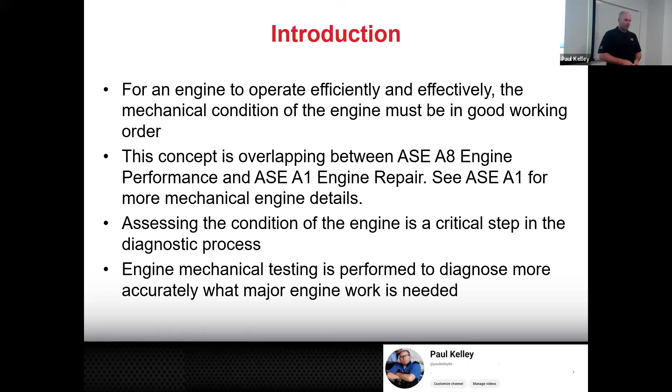So we're going to do some review of what would normally be ASE A1 stuff. Okay, and additionally, I told you earlier, there's ASE A6 stuff that goes into engine performance as well, but that's what we'll cover a little bit later, not this one. All right, so it's just extremely critical that we diagnose these right. So let's just say the first one right off the bat.

Excessive oil consumption. What does that mean? The engine is consuming, just consuming. So why is it consuming? Consuming is different than leaking. Okay, so I could even go a step more basic: if the engine's leaking all over the place, that probably really needs to be addressed as well, but that's not complicated.

You lift it up and you're like, oh, there's a bunch of oil all over here. That's not really engine performance. That's really, really A1, which is engine repair, sealing the engine, that type of work, right? So we won't talk a ton about oil leaks. We will talk about consumption. Those can be harder to diagnose. So if it's not external leaks, let's focus on internal leaks.

For example, we were talking about yours, but we'll make it about a different one. Who's driving the Toyota Matrix? Those are nice cars. I like those. Toyota Matrix is that you just can't kill those. They're good. It is, I'm telling you. Well, I mean, it might be older now, but those are good cars. So Toyota Matrix is a perfect example.

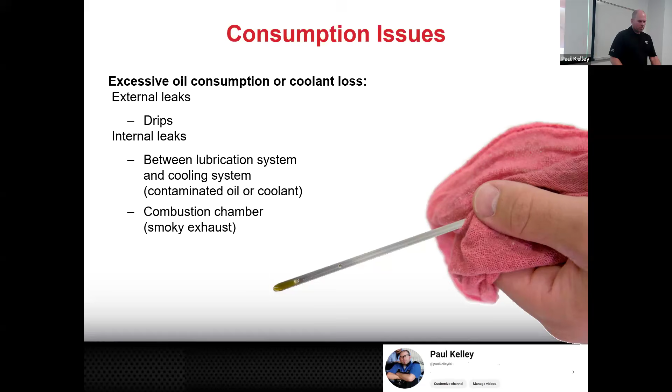So this is a pretty good indication, watching that oil level go down in a certain number of miles. But also, honestly, if you can see the blue-gray smoke, that's going to fail. I can tell you right now. Also in California specifically, that's one of the first tests they do. When you bring it in for a smog, they rev it up like this, boom, boom, and then they look at the back, and if it emits visible smoke, you're done. You failed already. Doesn't even matter if you've got all your monitors set and all that type of stuff. You're just done. All right, so that's pretty good probably for the oil consumption.

And then it could be coolant consumption as well, right? Coolant consumption is a bit different than oil. Every engine consumes some amount of oil because it's splashed on the cylinder wall and a little bit's left in the little scratches of the cross hatching. With coolant, there should be no consumption. It doesn't burn a little bit of coolant normally. If it's consuming coolant, there's something wrong.

Now, what I have seen is in some cooling systems, it's captured in a surge tank that's totally sealed. Those don't really lose anything to evaporation, but I've seen another type where it puts it in just a basic bottle with the flip open cap that's not real well sealed. Those can lose a little bit of coolant due to evaporation, but it's actually really the water evaporating out. The antifreeze doesn't really evaporate. It stays. It's kind of slimy and slippery. So if it has a little bit of low coolant, it doesn't necessarily mean that it's consuming it.

The most common thing is actually an external leak. But coolant leaks are kind of funny because your cooling system is pressurized. So maybe you have a leaking gasket, maybe a head gasket like this Explorer, I presume is a head gasket, or maybe it's an external gasket to the thermostat housing. That gasket may not leak until it hits, let's say, 13.5 psi. Make sense? If you pull in the shop and you shut the car off, you're not at 13.5 psi. The heat makes it pressurized. Once you shut the engine off, as it gets cooler and cooler, it's losing pressure.

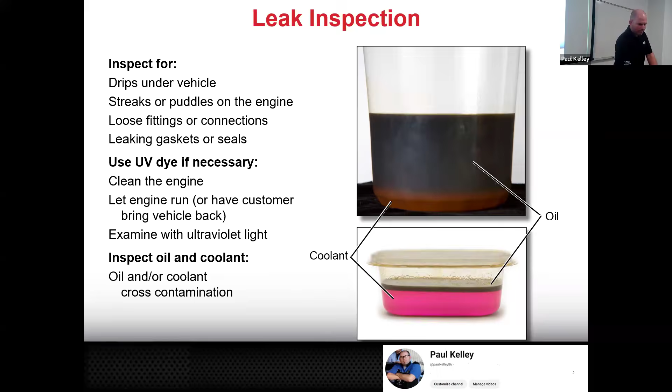All right, so let's say another clue to the engine. One of the first things we could do, if you remember that sample question we looked at, it's a good idea to do a road test. I don't call it a test drive because a test drive to me means you're testing it to see if you like it, see if you want to buy it. I'm going to do a road test, because I'm using the road to test the car. So could I check compression? Yes.

Could I also take it out on the road and drive it and get a sense of what the compression is? Yes. So therefore, to me, it's a road test. I'm using the road. And if I road test it and I get that smoke, look at this, gray blue. What do you think that gray blue indicates? Oil consumption. So maybe rings, head gasket, valve guides, oil seals, these types of things. We don't know. Now, I'll give you a little bonus.

If it's rings, typically when you gas it hard, like when you're wide open, remember that little Civic I told you about when it gets on the on-ramp? When they're wide open, if it's smoking in those instances, I'm probably thinking rings. But when I say rings, just understand that could be worn cylinders, but I'm saying bottom end, that's below the head gasket. Whereas let's say under wide open throttle, it seems pretty good. Under wide open throttle, you don't make a lot of vacuum. So there's not a lot of suction in the intake and in the intake port.

But on decel, you let off the gas and you go, brrr. Sound pretty good for like a B series, huh? Like that. That's when you build a lot of vacuum. And if it's valve guide seals, it'll suck the oil past the leaking seal and you'll get a lot of smoke on decel. So literally just being behind a car as they accelerate and decelerate, I can get a pretty good idea. On accel, that's probably bottom end, rings and stuff. On decel, that's probably more like worn valves, worn valve guides, or valve guide seals.

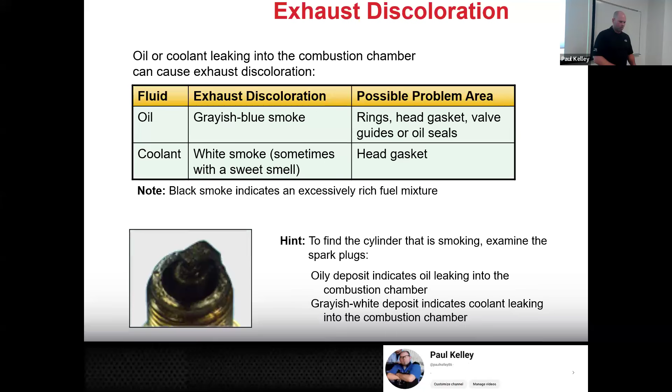All right, so what if the engine has a noise? There's some things that can cause engine noises. There's some things that can cause engine vibration. But ultimately, let's say the engine is knocking. We need to diagnose that. You need to diagnose why the engine's knocking. Don't be bolting stuff onto it. So I'll give you another example.

Let's say the engine's not knocking, but it's whining, right? A whining engine could be something like maybe timing chain or an oil pump, but it could also be a belt-driven accessory, an alternator, power steering, water pump, these types of things. So customers will come in and say, hey, my engine's making a noise. That's still an engine performance concern. It may have full power, but they're still like, hey, I've got a concern about how my engine's performing.

So if you think the noise is coming from the alternator, you put the point on the alternator and you listen through the stethoscope. And if it gets really loud on the alternator, then you move it to the engine and it's quieter, and you move it to the alternator and it's louder, kind of telling you the noise is from the alternator.

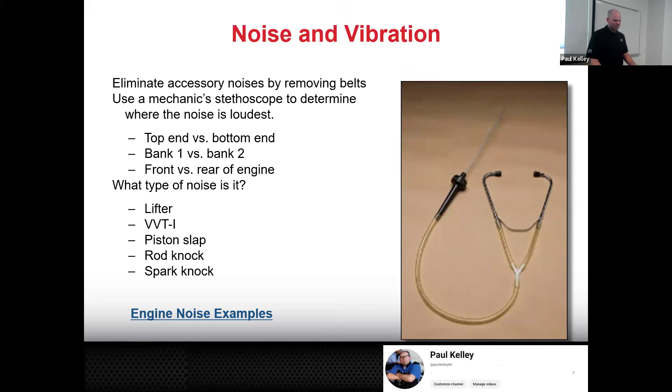When I say I rebuilt it, that block was so trashed I actually bought a junkyard block and started over with that one. So it was fun. It's a perfect thing to do when you're 20 years old and you finally start to make enough money where you can fix it, but not so much where you can just be like, give me a new car. It's perfect timing for me. All right, so kind of summarizing what I had already said. Some of the noises could be simple.

It could just be like a belt type of thing, but it could also be like the knock of death, a rod knock. And it could be anywhere in between. So we don't want to condemn the engine if it's not the engine, but we also don't want to chase external things if it is the engine, right? So that's just kind of the trend we're going into here, right?

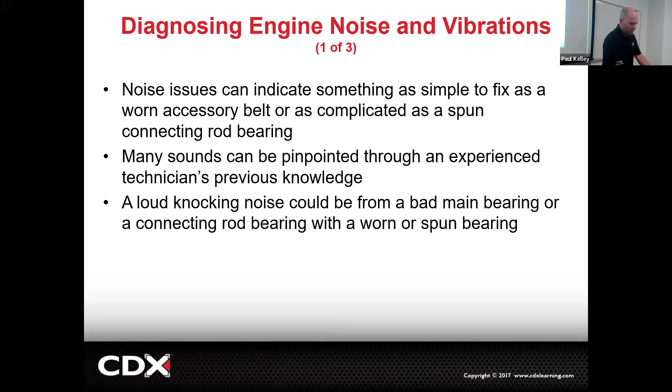So like a loud knocking noise, that's a rod, that's going to be down in the engine, or any of these mains, right? So we'll talk about some of these bearings. All these bearings, I would say, are like the weak point of the engine, that's how I'm going to describe it. It's very easy to damage a bearing. So if you run low on oil, you could damage a bearing. If you have coolant going into the oil, that's not going to lubricate it correctly, you damage a bearing.

If you, for whatever reason, took some apart and you weren't careful, and you get some debris down in the engine, which I have done before, I'm afraid to say, you could damage a bearing. These bearings are just not that tough. Like the bearing is specifically a soft piece of metal so that the crankshaft and the block don't wear each other out. We put a soft piece of metal that's going to take all the wear.

That's cool. The negative is it's easy to wear it out. So you could easily damage it. You could literally scratch it with your fingernail. So these bearings are sensitive. And if the bearing fails, it's a big deal. Like you got to do a rebuild. It's kind of a big thing.

If it's a main, and without going too crazy into engines, the main bearings support the center line of the crankshaft to the block. Those tend to be more like a deeper thud. If it's a rod bearing, those actually take the power of the power stroke onto the rod, and they push on a journal and they spin the crank. So what's kind of cool is if you have a knock and you think it might be a rod bearing, we can disable the cylinder.

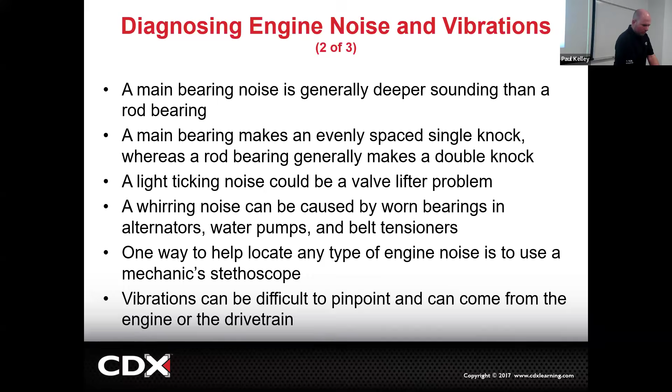Cool. And we could go more, but I think we're pretty solid on those. All right. So let's say we're just going to jump into one of our first tests. There's many tests we could do. Part 2 goes over more of the tests. Part 1's mostly about the engine and then a little bit about the tests.

If we thought we had low compression, we would do compression tests. If we thought that we had a problem with a valve, or like anything in the valve train, we might actually do a vacuum test, right? So when we start talking about this stuff, just keep in mind, you have to understand how the engine works and then be able to determine what test to do to tell whether or not you're correct.

So when he gave that Ford Explorer to me for a misfire, I was already kind of thinking about it. I was like, well, are you losing coolant? And he said, yeah, a little bit. So as soon as he said yes to a misfire and yes, I'm losing coolant, I already had in my mind what I thought could be wrong. Could I diagnose it? No. But I had an idea of what it could be.

The next test I want to do, you could do the compression test, but the real test I want to do is actually a coolant pressure test and put a camera down in the cylinder. Make sense? So if you get to that point and you can understand exactly how it works and then understand the symptoms, you'll know which test to do first.

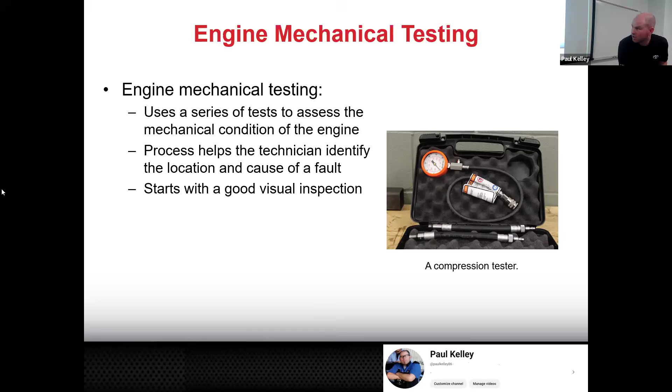Make sense? So it's very important we know exactly how this engine works so we can interpret the test, and also you might pick one test over the other based on the symptoms. All right, cool. So the compression test is just one example. That'd be a good test to do. Exactly. Everything we're going to talk about for today and for next week, which would be your recorded, is all testing the mechanical engine. Every test we're going to talk about. All right.

So let's say for this example, we have a running issue received. I'm going to pick a Tahoe that I did kind of recently. Customer's concern, this is what's on the RO: customer states check engine light is flashing and the engine feels rough. So like, all right, what's rough mean? Well, the flashing check engine light, honestly, that already tells me everything I need to know. When a check engine light flashes, that means it's a catalyst damaging misfire.

So do you know what a misfire means? It means it's missing a fire. So like one cylinder is not firing. At least one. So if it's got a flashing light, I'm like, all right, it's got a misfire. So this is a mechanical concern. Could it be ignition? Yes. Could it be fuel? Yes. Could it also be engine mechanical? Yes. If I'm using this one as an example, you already know probably where this is going to go, right?

So talk with the guy, nice guy. He already had somebody else look at it. It had all new spark plugs in it, and it had markings on the coils where they had been moved all over the place. And it had one new connector on the injector, and it kind of looked like the fuel rail had been off. So I'm like, all right, somebody's been trying to move stuff around, figure this out. Unsuccessfully, clearly.

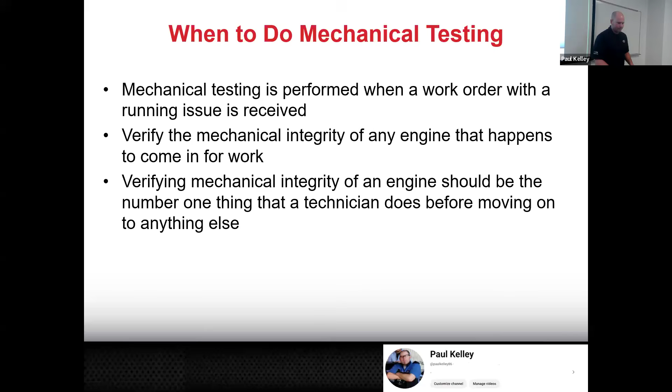So quickly, I'm like, no, we need to check the compression. Oh, it failed. I wasn't like, I don't want to check that because I'm afraid it could be that. Just boom, done. All right, so that's all I'm going to tell you for right now. I'm going to use this car a little bit later. If I do the compression test and it fails, what do I know? It doesn't make compression. It's in the engine. But that's it, though. I don't know what's wrong in there. I just know it's that. So stop putting spark plugs and stuff in there. All right, cool. So I did that pretty early on.

The other thing that's kind of fun: sometimes the way it cranks can tell you something. So that cylinder has no compression on cylinder 4, right? So if I were to start the engine or just crank it over, and I'm gonna lie, the firing order, let's just say is 1, 2, 3. Let's make it a 4-cylinder for now. Let's just say this compression goes 1, 2, 3, 4. If I crank it over with the starter, right, the starter has to fight compression. It slows down.

It's like roar, and then cylinder 2, roar, and then cylinder 3, roar, and then cylinder 4, roar. So when you start the car, it should go like roar, roar, roar, roar. Or you might say sha na na na na. You can make the different sounds, but you notice there's like a rhythm.

All right. If you go to crank it and it sounds like that rhythm is off, that could actually already give you a clue that one of the cylinders might not have good compression. So when it goes, you're like, what the heck is that? It shouldn't be like that. And then you're like, well, maybe it's got low compression. Cool. So it sounds crazy, but you can actually get a hint of whether or not it's an engine mechanical issue. Just listen to the crank.

I had another guy with a Nissan call me. And usually if they ask if I'm Pablo, I already kind of know, all right, this is one of the guys who got my name from one of the other laborers and the workers. And they're good guys, but I'm usually stepping into a mess. The only people who call me that are a lot of the people I work with where I'm at in the ranches, right?

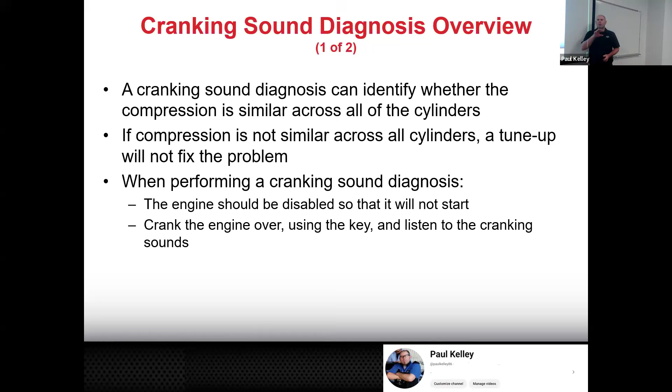Makes sense? So you could throw all those parts on there. You could tune it up, but if the timing belt's broken, it's not going to fix it. If you throw all the tune-up things on there, but the compression's low on cylinder 4, it's not going to fix it. So go away from that and just do the diagnosis. That's going to be our focus. Cool. I think we're probably pretty good on the different cranking.

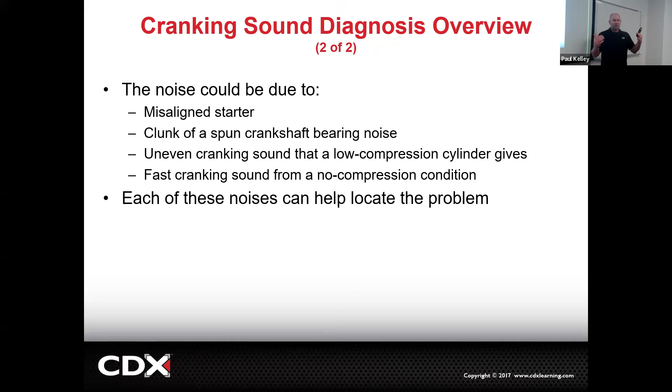For example, that Nissan was a fast cranking sound from a no compression condition because the timing belt was broken. Uneven compression because cylinder number 4 is not making compression and the other 7 are. It'll sound uneven. And then, of course, if it sounds really bad and it's knocking and broken stuff, that's a little different. So let's talk about what a cylinder power balance is. These are going to be some of the tests. Most of them will be in part 2.

If I do a power balance, here's what it is. Let's make it a 4-cylinder. I'm going to use really nice round numbers for us. Let's say it should be idling at 1,000 RPMs, because that's normal. You compare it to another car and that's idling at 1,000. This customer car is idling at 750. Knowing those numbers, where do you think I'm going with this?

Let's think about it like this. If it's a 4-cylinder and it should idle at 1,000 RPMs, each one of those 4 cylinders contributes an equal amount of RPM. How much? 250, 250, 250, 250. Exactly. The customer's is idling at 750. One's not working. Which one? I don't know. So I disable one of the cylinders. Does it make a difference? Yes. I reconnect it. It comes back up.

So it's at 750. I disconnect this one. It drops to 500. It's barely running. I plug the coil back in. It picks back up to 750. Was that one working? Yes. Now, how I did that depends. On a coil-on-plug car, I'll probably just disconnect the coil.

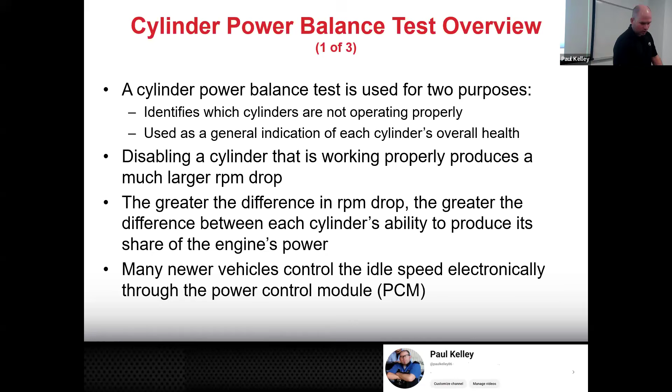The other cool thing is the newer car is going to be running onboard diagnosis. So it's probably going to set a code for a misfire that's specific to the cylinder. So if it's cylinder number 2, you probably have a code P0302, misfire cylinder 2. All right, so we don't do the power balance all that often anymore with the newer styles, just so you all know. And you get a copy of this if you want it.

I'm going to jump to the next one. So we talked about how we can do it. We talked about the old school ways we could do it. I can even show you this as one of the ways we do it on the scan tool. But before I get too detailed into that, I want to make sure you understand one of the next steps is to determine whether to disable the ignition or fuel. So how? Whichever is easier, basically.

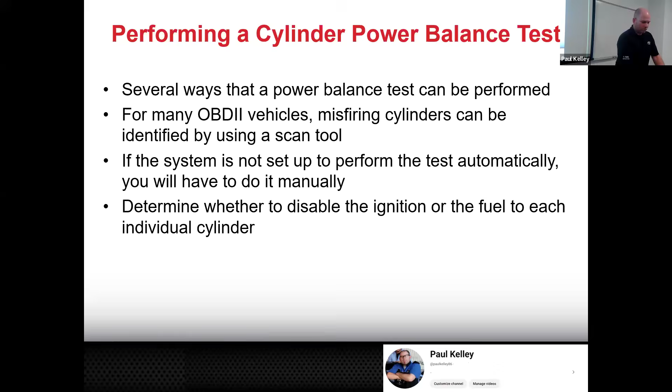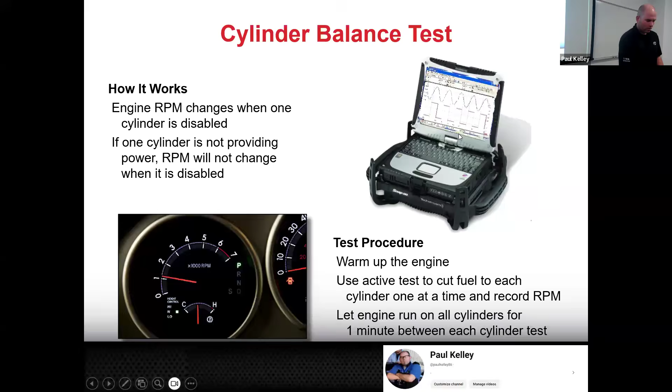If it's a gasoline direct injection, you're not gonna be able to reach those injectors, so you're probably gonna do the coil. If it's an old school engine with big spark plug wires, I'd probably do the injector. If it's really new, you're literally gonna do it through the scan tool. And what's really cool is you can watch the RPM through the scan tool. This RPM is what you think you're gonna watch, but then you gotta be in the car and you're outside the car. So you might as well drag the scan tool around the front and look at it, like with a universal scan tool.

Makes sense. So if we're using this Snap-on scan tool and we get it up to RPM and you look at this idle speed, what's the idle speed in this example? 701 RPM. Then you can disable them mechanically and watch that number change or not change. And the number will jump around a little bit. That's normal.

Or sometimes what you can do is through the scan tool, just press disable 1, disable 2, disable 3, disable 4, right? So the test can vary a little bit. Mostly all you really need to know is how to interpret the results. You'll figure out how to do the test. It's not hard. It'll usually walk you right through, right?

And then the other thing is a lot of times you'll wait a little bit of time. You'll see how much it changes. And we also don't want to leave it disconnected too long. And the main concern with that is, let's say that you disable spark and it still sprays fuel. The engine's still running. Where's that fuel going? In the cylinder first, and then we're probably going to pump it out the exhaust, and all that fuel is going all over your catalytic converter, and your catalytic converter is not happy.

That's one of the reasons that when we have a misfire, the light flashes. It's saying like, this is a catalyst damaging misfire. Every time your vehicle misfires and raw fuel goes into the cat, it's ruining the cat. Remember what I said about cats, don't you? All right, so if you have a misfire and it kills the cat, and you put a cat in it and you don't fix the misfire, the next cat's going to be also murdered. It's the way it is, right? So we got to be a little careful with that.

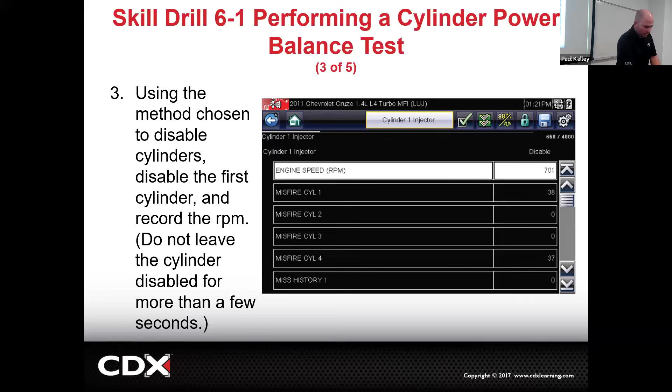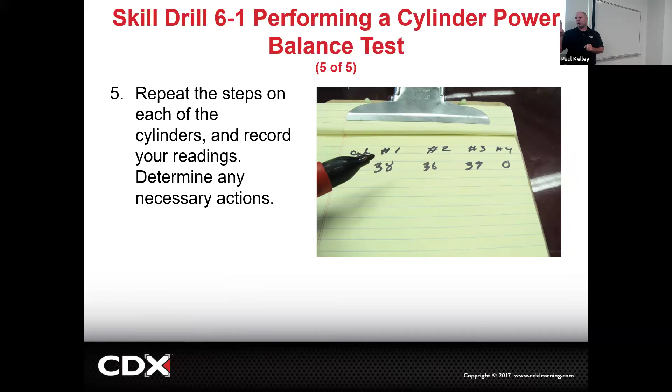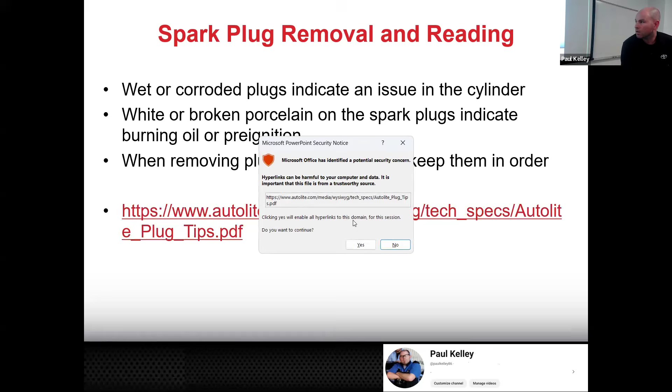And then you write your numbers down, and it's not really that super difficult. And the other thing is, let's say after you do your power balance, we all agree it was cylinder 4, right? Now what? I would probably try to take a look at the spark plugs. And I've actually got a little link right here that I think will pull up okay. Yeah, this is safe. I trust it.

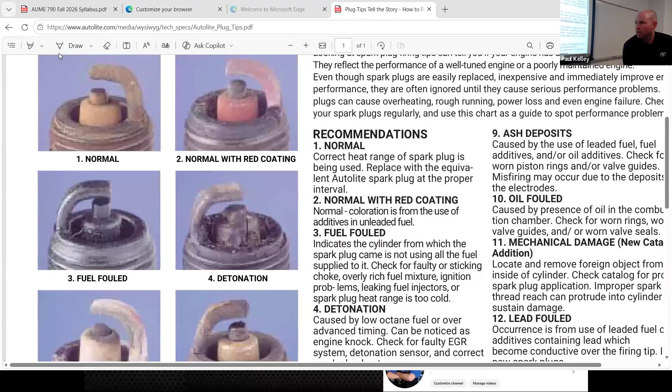So here's a cool little reader diagram, right? So there's normal with red coating. Coloration is from use of additives in unleaded fuel. I was going to say I have never seen normal with red, so that's kind of interesting. Fuel, that's wet. So fuel fouled, which means not all the fuel got burnt. Maybe it's too rich. I also see if the spark doesn't occur, it leaves the fuel in there and it ends up kind of wet, right? So that would have been a clue.

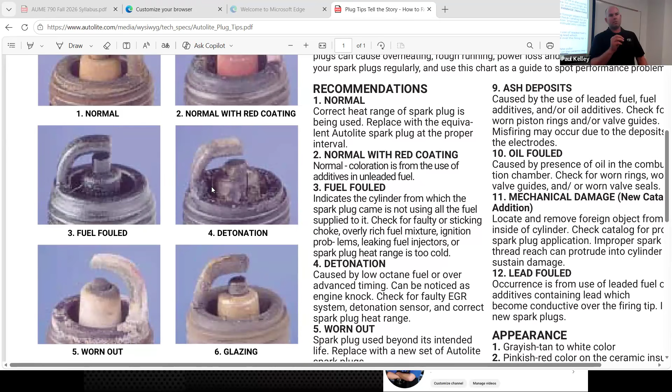Detonation damaged, and detonation would take too much time to explain. There's more than likely multiple flame fronts in the cylinder. It's probably hot. Worn out is interesting. Worn out is not a defect. Worn out just means that gap gets bigger and bigger over time, because with all that firing, we start to wear away some of the electrode, the grounding and the center electrode, and this gap gets bigger, and those won't fire very efficiently. And when they get so far gapped, they won't even fire at all.

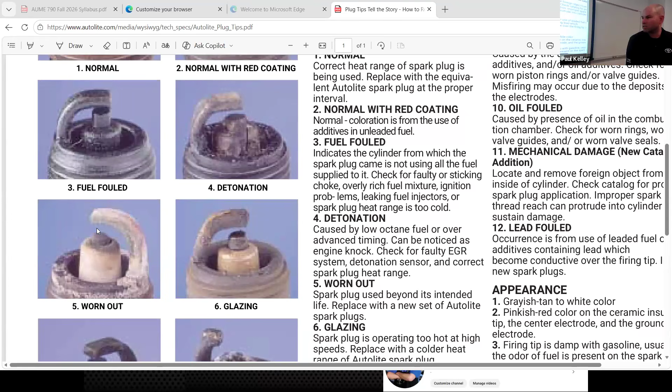And the bigger that gap is, it's actually harder and harder on the coil. So if we're doing this test and you see that the gap is big, it's like, hey, you need spark plugs as maintenance. Back in the day, spark plugs used to be maybe 24,000 miles, 36,000 miles, 60. Now they're like 100,000 plus. So we're not doing spark plugs that often. If they're iridium coated, we'll do more of that in ignition. Glazing's interesting. I would have to say probably too hot of a spark plug.

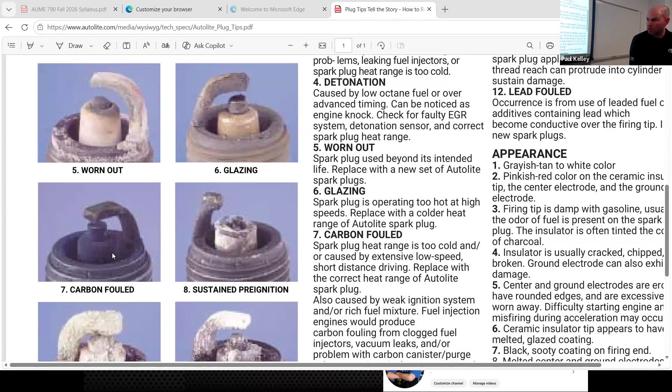Carbon fouled's interesting. Let's say that we had carbon. It's not getting hot enough. It's almost like if you have a fireplace and you never get it that hot, it tends to soot up the glass. You guys wouldn't know, California people, but if you go someplace cold, there's this thing called a fireplace. If you don't get the wood hot enough, it'll fog the glass with dark. It'll be dark looking. Get it hotter, it'll burn that off. We'll skip a little bit. You can see a few more.

Here's an oil fouled. So that one's oil consumption, right? So if we do the power balance, and then we know it's cylinder 2, and I pull the spark plugs out, cylinder number 2 spark plug is going to give me a clue as to what's up. See what I'm saying? So we do the power balance at cylinder number 2, I pull it out, and cylinder 2 is, let's say, oil fouled. Do I pretty much know what's up? Why is it so oily? It's got oil consumption. Something is wrong with cylinder 2 internally. Makes sense? I don't know exactly what, but I'm on a direction.

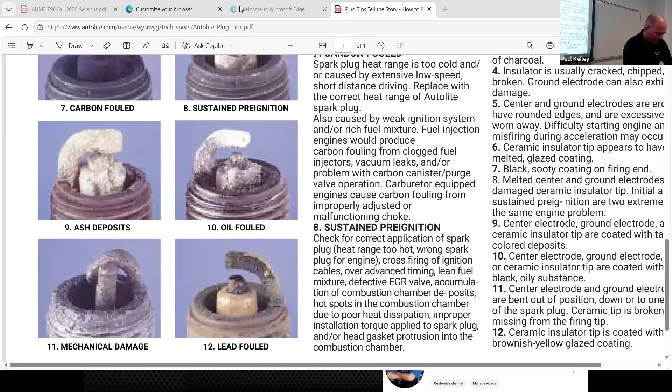I'm not lost in the weeds. Like, I think it's the radiator and it could be the other. You see what I'm saying? So we're going through a sequence, right? And you guys can have access to this, but without delay, we'll jump back where we're supposed to be here.

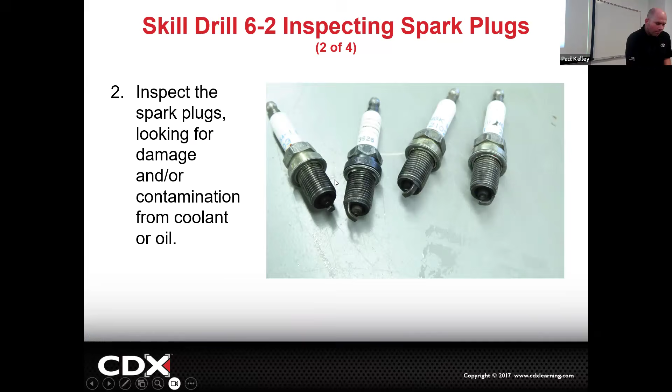We're going to pull the spark plugs and line them up, right? And then we can really take a look at them. We could do all the maintenance like gapping spark plugs and checking the gaps, but honestly, if a car comes in for a misfire, it's very unlikely that it's a gapping problem for a couple reasons. One, they don't need to be gapped all the time. So if they were gapped right when they were put in, they didn't lose their gap. And if they did, it's because they're worn.

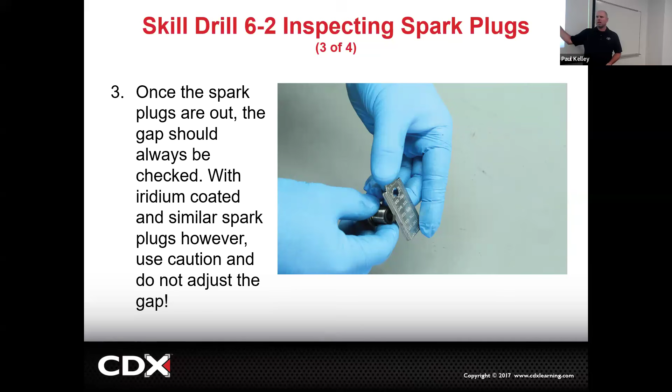Or if the spark plugs were just put in and the technician's not careful and accidentally bends the electrode in, it'll short it out and it won't fire. So look at the gap, but don't bust this out, because we don't gap modern spark plugs. Those are iridium laser coated fancy spark plugs. If you try to gap them, you actually scrape the coating off of the spark plug, and it's no longer the $15 iridium. You just made it a basic Champion. That's $2. So don't do that. Inspect it, but don't touch that.

Cool. So if you look at this one, maybe this one is oil fouled or carbon fouled or something. Makes sense? So we're getting a good clue. If you get in there like what I did with the Ford Explorer, I saw it looked kind of steam cleaned, but it had shiny deposits on it. What was the clue on that one? Coolant. So I'm thinking, let me pursue this, right? So we're really kind of like detectives in a way. I think this is gonna be coolant, let me go ahead and pressure test it. And boom, there's the coolant and the diagnosis is done in half an hour.

And I'm billing an hour because I still got to put it back together. And the customer's not really that happy because the engine needs to be done, but he's not unhappy with me because I didn't misdiagnose it. And that's what's good. So if this one was oil fouled, something's up with the engine. Then you might have to go to the customer and say, it's in the engine. I don't know what it is. You may need an engine, and it may be some of those numbers I was saying: 6,000, 12,000, 15,000. It depends on the engine.

Do you want to proceed, or do you want to just pay me the diag time and you know it's in the engine? Tell me what you want. Junk it, get a new car, forget it. And all you owe me is the 1 hour to diagnose this. And I'm happy to take that 1 hour and not even get involved. What I don't want to do is put a bunch of stuff on it and then be like, I think it might be the engine, and then you're like, well, give me my money back. And I'm like, well, but I did the work. And you're like, yeah, but you didn't do it right.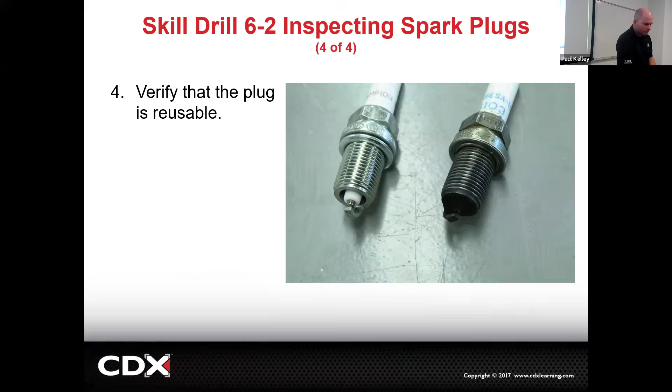When you get older, you figure it out. Working is good, but you want to collect as much money for each hour as you can. When you get to this point and you can do this type of good, clean diagnosis, you could bill good for it. And it's a great service to the public because you're not misdiagnosing and guessing and spending people's money putting spark plugs on an engine that's no good, right? So that's where my mind is at. All right, so let's go through the 4-stroke cycle.

This is a spark ignition. You guys know what that means? It's got a spark plug. Yeah, spark ignites the combustion. So like right here, these are not the 4 strokes. This is just what happens with the combustion. The spark occurs, it ignites the air and fuel, it starts to make flame right there. Flame burns, and when it burns, it expands the gas, right? It expands it. And you know what that does? Pushes down on the piston.

So this is just the power stroke right here. Combustion's continuing, it's pushing the piston down. Combustion's ending, the piston's on its way down. And then by then we've burned up all the fuel and the air is now no longer oxygen. It's like inert exhaust gas. We got to get rid of it. This is spark ignition.

This is different. This one, we have intake brings air in. So if I bring this back, this is air and fuel. This one brings in just air. And we compress it on this compression ignition to a much, much higher PSI, a much higher ratio. It's a higher number. Then what we're going to do is we're going to do a fuel spray.

And because this is a diesel and we're running such high compression, 22-to-1 or so, that's going to actually ignite itself. There is no spark. But the combustion is occurring because the very, very high compression and the fuel is actually going to push the piston down. And other than that, it's the same. So what's really the difference? This one is controlled by the ignition, and this one is controlled by the compression. Ignition starts the fire, compression starts the fire. Other than that, that's pretty much it.

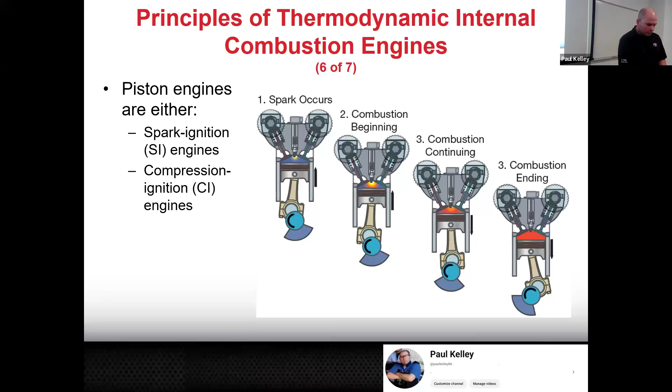Cool. So we're mostly focused on compression, and this mostly just goes over like, when you increase temperature, it increases pressure. And when you increase pressure, it increases temperature. So the reason we need to compress it is we need to get that air and fuel nice and hot. So it's like ready to burn. It's kind of like the wildfires around here. You don't really have a lot of fires when it's cold. It's when everything's hot, dry, ready to burn.

We need to get the compression up because that high pressure is going to result in a high temperature and everything is hot. And then all it takes is just a little spark, boom, and then it's burning. Right? So that's just the Charles law, which you could also apply to brakes or a number of things. All right, here's a fun one.

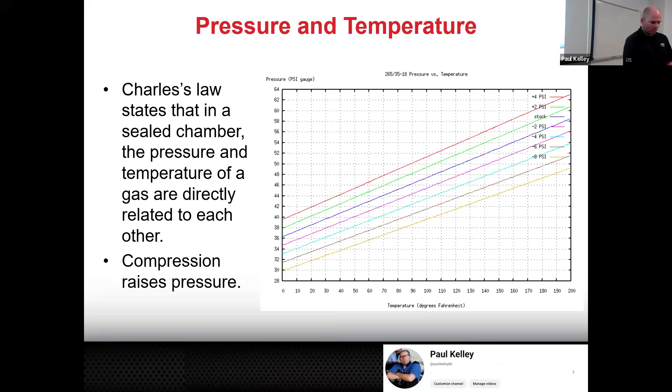Here you go. Here are the 4 strokes. If you knew these 4 strokes and you wanted to make a cool t-shirt, you could. We'll explain them the way I explain them first, and then we'll make a cool t-shirt version or a bumper sticker. All right, let's start with number 1, shall we?

Intake. You know what happens on the intake stroke? It's like the breathe in, right? Breathe it in. But you got to notice we got a valve that's open right here. So this intake valve was pushed open, and the piston going down is going to pull that intake air in, right? That's how it's going to work. So to make the intake stroke, we had to do some things, just understand.

It started at top dead center, and when it gets to bottom dead center, it's going to turn right around and start going back up with the valves closed. That's how we know it's the compression stroke. So if we look at this one over here, it's going back up, it's got a valve open. This one over here is going up and both valves are closed. That's the compression stroke. Why do we need the compression? Higher pressure, higher temperature, get everything ready for the spark.

So let's just say we screwed up and we accidentally opened one of these valves during the compression stroke and it bled all the compression off. What would we have? A misfire. It'd be missing a fire. That's right. Exactly.

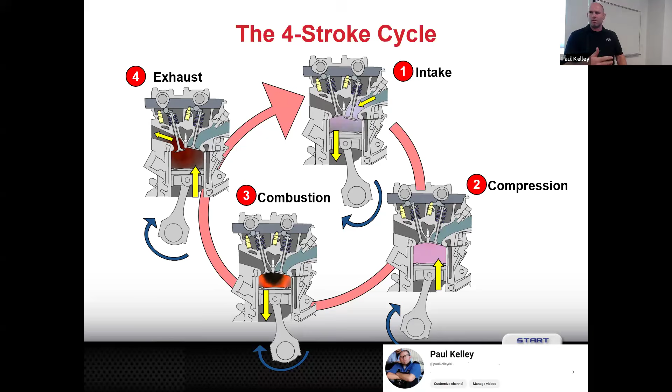Makes sense? So if you think of this, you'll be able to do pretty good diagnosis. If you go one after the other here, intake, you notice the camshaft has to open the valve. Air comes in for two reasons, really. Out here, there's what's called atmospheric air pressure. At sea level, that's 14.7 pounds of air that's above us. So above sea level, it'll be less, and below sea level, it'll be more. So that air is kind of trying to be pushed in.

But what's also happening is when your piston is going down, because it's sealed really nicely, this piston going down is leaving like a vacuum. It's leaving a space, right? The piston went down, it's trying to pull the air with it. So what's interesting is if you don't have a good sealing engine, yes, it won't make compression, I agree, but it also won't make the correct amount of vacuum.

So a while ago, I'll make it the shorter version of the story, a guy was trying to diagnose a MAP sensor code, and a more senior guy to me who knew the old school ways came over. He's thinking like, yeah, I put a MAP sensor in, it didn't fix it. The senior guy came over with a vacuum gauge, plugged it in, and ran the engine. A healthy engine should be like 21 inches of mercury. This thing was like 9. So he's like, yeah, your engine's not making enough vacuum. It's like, yeah, but it's got a MAP sensor code.

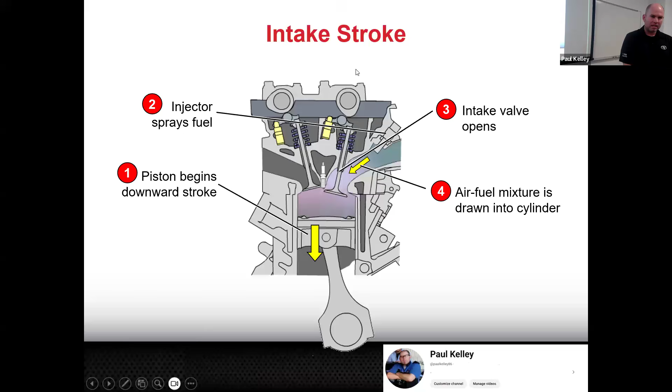But remember that one that had a broken timing belt? The timing belt's job is to time this cam. So if the timing belt's broken, this intake cam is not going to open the valve on time. That one didn't make compression because the timing belt was broken, and these valves were just chilling, hanging around like that. Yeah, I know all this stuff, right? Compression, mostly we're about leaks.

What if we had a worn cylinder like Bessie? We're going to lose compression down here. What if the technician was running the air ratchet and the screw fell out of the air ratchet and bounced into the engine, went down the intake, went down in the cylinder, and was chilling on top of this piston. And when it came up once, it got wedged and popped a hole in that piston. What are we going to have? I'm speaking from experience, right?

So after the big job, the intake reseal or whatever, all of a sudden this engine's got a misfire. We measure compression on that cylinder and it's got 0. We end up sending a camera down in there. The screw actually popped a hole in the piston. It broke the piston. You have compression loss through a hole in the piston, right? So all this is going to result in low compression.

So when the Tahoe has low compression, I didn't say it's your rings, it's your valves, it's a hole in the piston. I didn't say that. What I said was, it's in there. I don't know what. You want to pay more money? Yes or no? And that's it. And if it's no, we're good. I'll take the little diag. You know it's the engine, but that's all I could tell you. Cool. So mostly the compression is where we focus.

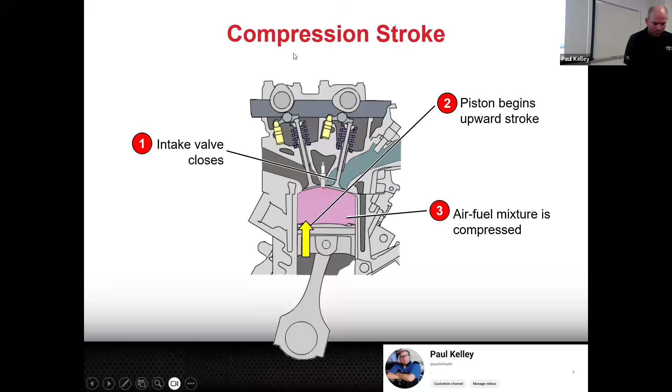And then of course, the exhaust stroke is pretty simple. We just open the exhaust valve, push it out. A couple terms were in there: top dead center, bottom dead center. Did you catch that? When the piston's all the way at the top, that's top dead center, TDC. When the piston's all the way at the bottom, that's bottom dead center, BDC. The difference between BDC and TDC is how far it strokes.

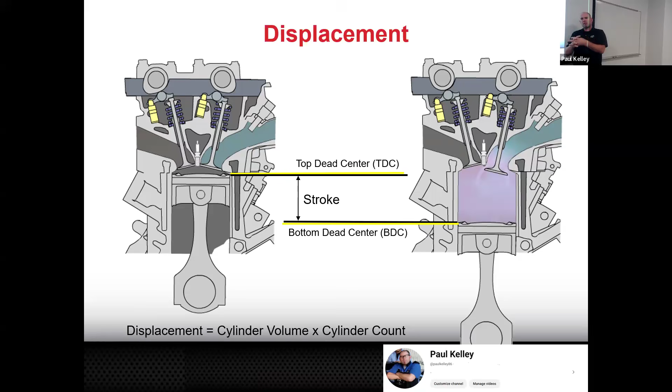So if you hear bore and stroke, the bore is the size of the cylinder, like round, and the stroke is how far. So if you got a stroker 383, that means you're stroking further like this, which means you're going to pull more volume of air. That's your displacement. Cool. So just talking a little about engines there.

Your compression ratio is different. That's basically how much the volume of this whole cylinder is going to be squeezed into the volume of just your head, your combustion chamber. That's a ratio, right? So in this case, 8 to 1, that's pretty low. You got 8, whatever, cubic inches, cc's, milliliters, whatever volume you want to use. 8 imaginary units are going to be squeezed into 1.

That's your ratio. More modern engines would be 9 or 10 to 1, 10.5 to 1. I've heard like 11 something. Race car stuff might be 13. That's going to sound good. Higher compression is harder on the parts, but it is more efficient.

And efficiency, right? So when you say how much compression should it have, it depends on the ratio. That's why I gave you numbers. 135 maybe, 200 maybe, it kind of depends. But all the cylinders should be pretty similar though. You don't have 8-1 compression on one cylinder and 10 on another. They're all going to be designed the same.

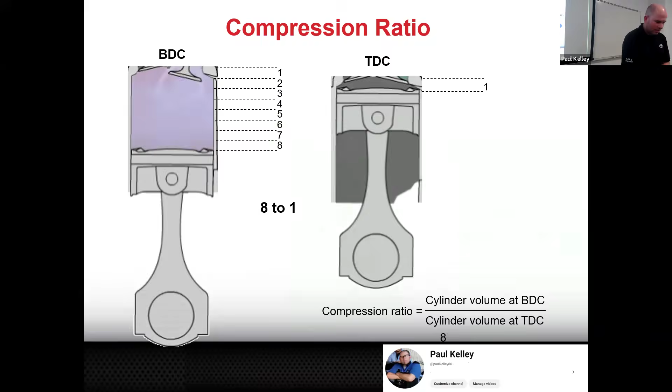All right, what happens at the top of compression? Spark. So in our minds, we think, yeah, when it gets to TDC of compression, let's spark the spark plug. What's that going to do? Fire, flame.

Audio on. Test, test. Yep, that's good. All right.

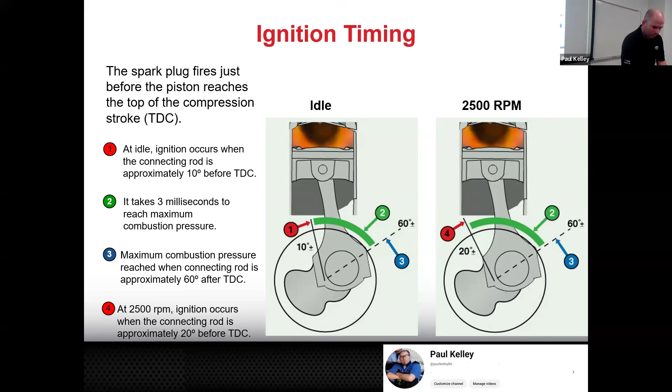All right, so a few tests we could do that I think you'll find not that complicated. And then we'll be really set up for part 2. Thing's definitely mad at me.

All right, the vacuum test. Remember the vacuum test I told you? We had the engine with the vacuum, the MAP sensor code. This little vacuum gauge right here, all we're literally going to do, and I got a nice video on how to, we're going to find a vacuum source on the engine, and we're going to plug this one in there. And that's it. And it's going to give us a reading. We'll see what the reading is.

Like I was telling you, on a healthy engine, maybe 21 inches of mercury. So that's just pointing at the 21 number. Could be 22, could be 19, could be 20. If it's 12, that's not good. There's something wrong with the breathing of that engine. So the vacuum gauge is mostly to evaluate how well the engine's breathing.

You go to the doctor, they put the stethoscope in, they listen to your breathing, right? That's kind of what we're doing here. We're not listening to it, but we're actually seeing how this engine is breathing. If it's got low compression, it's going to have lower vacuum. Lower meaning closer to 0, right? So the vacuum is a negative number. In fact, if we were to look on this vacuum gauge, what's really cool, it's at 0 right now. The vacuum numbers are over here on the left in red.

The positive is over here on the right. Does anybody know, if we were to hook this up to an engine and it were to show positive numbers, there's a term for that. You know what it is? It's not vacuum. It might have to do with a turbocharger or a supercharger. That'd be boost. Yeah. PSI is boost.

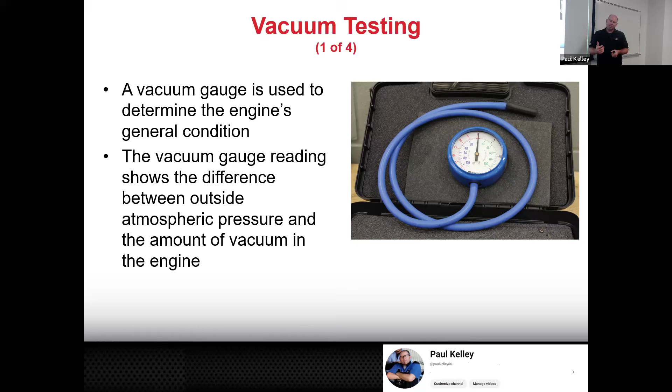10 inches of mercury is some amount of suction. That's probably not enough to suck up the milkshake, though. You need like 20 inches of mercury to draw it up the 20-inch straw. See what I'm saying? So the higher the number, it's actually technically the lower the pressure because it's measured in vacuum. It's kind of weird. All right, so we could go ahead and put that on there. And these are some of the numbers. 17 to 21 would be typical. That'd be healthy. This number is going to vary depending on your elevation and whatnot.

But go ahead. Are we testing this with engine running, with fuel, or are we disabling the fuel? No, it's going to be running. Yeah, so I'll show you right here on this one. We are literally going to connect this vacuum gauge, and we're going to start the engine. And then we're going to see what it reads.

Or the needle might bounce. So we're not just looking at the number, we're also looking at what's the needle doing. If the needle's bouncing, that's actually going to tell me it's breathing good and it's not breathing good. It's good, bad, good, bad. Something's going on there. If I see the needle bouncing, I'm already sketched out about the valves, right? If it's a vacuum leak, it wouldn't bounce, it'd be steady low. If it's low compression, it's going to be steady low.

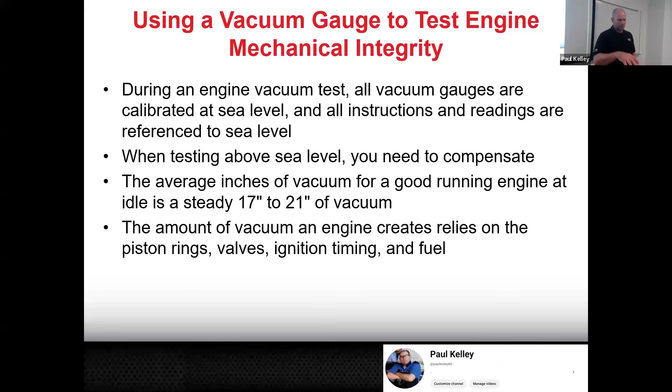Week 3. Exactly. I made the video last time because it used to be so simple. Honestly, you'd just be like, oh, the intake manifold is here, I connect it to there.

But on a newer engine, especially something that has really aggressive variable valve timing or a turbocharger, or Atkinson cycles, which have become really common, especially in Toyotas, they don't make steady vacuum. So what's crazy is they run an engine-driven vacuum pump. So if you connect to a typical spot, you'll be like, wow, this thing makes like 25 inches of mercury all the time. It's amazing.

And I'll be like, hit the throttle. You'd be like, vroom, and it doesn't even drop a millimeter. And I'm like, no way. Oh, you're connected to the vacuum pump. Of course the vacuum pump's going to make amazing vacuum. So you need to know, don't connect there, connect over here. It used to be simple, but now they've got all sorts of stuff going on. So I made a whole video on what to look for and where to find it, and you'll be fine.

We used to mostly just pull it off the brake booster because the brake booster is right there. But now the brake booster is a lot of times powered by a vacuum pump. So we've got to find the actual intake manifold vacuum. And we'll be there. It's a really easy test. I swear, it is super easy.

All right. Then we're also going to do another test with a throttle snap. So we're going to go boom, and then we should be able to see how low did it go and how high did it go. So at wide open throttle, it should go to near 0. And then when we snap the throttle closed, it should actually get to an even higher number. So see, we got almost 21 inches of mercury out of that snap test. Cool.

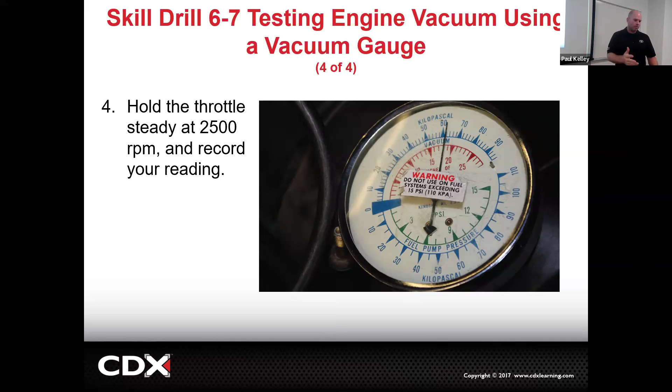Keep in mind, the job of the valve springs is to pull the valve closed, and at idle it's pretty easy. But at high RPM, the valve spring's like, get back up here, get back, I'm running, it's getting away from me a little bit. And next thing you know, your valve's not snapping closed all the way because your valve spring's weak, and you get the bounce in there.

So that one's real common on ASE A1, and it's somewhat common on ASE A8, this concept here. Steady, but it bounces at high RPMs, I'd be all over a valve spring. So this is a cheat sheet. You're all going to get a copy of the cheat sheet.

So when we do the test on the lab cars, probably they're going to pass, but some of those cars are pretty rough, so I would not be shocked if some of them fail. If you have one that's misfiring and you do the vacuum test and it does some of these types of things like a bouncing needle, it's a pretty good indication that it's a mechanical engine problem. So it gives you a good clue. Here's a second cheat sheet. We've got a couple versions.

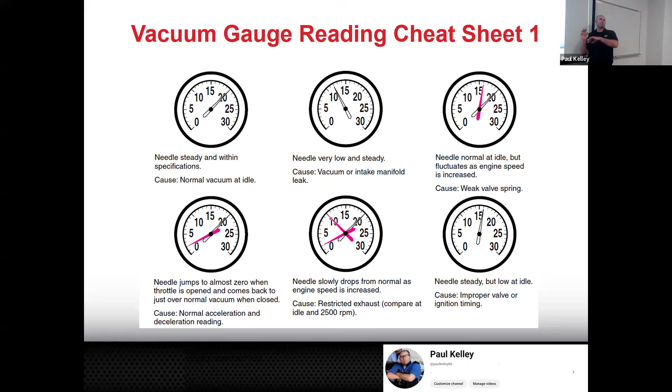So we'll do some of these types of tests. I'd say probably the first thing would be the power balance, and then maybe the next thing could be a vacuum test, and then maybe after that, I might go to compression. Kind of depends on what my initial readings are though.

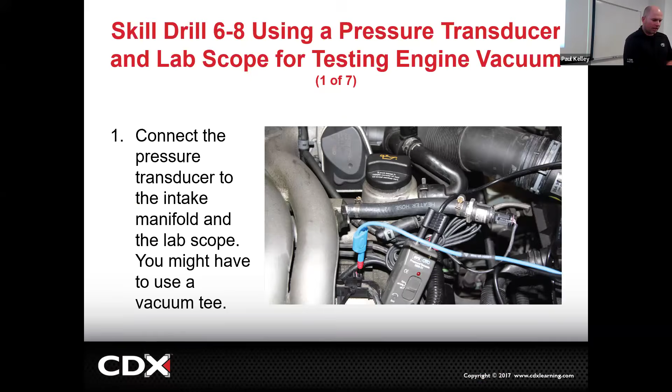All right, but now you want to see a really cool way we could do it? We're going to do high tech now. What if rather than doing the basic gauge, instead we use a transducer and an oscilloscope. We hook it up in the same way, to vacuum, but then it changes over to electronic and displays it on screen. And you can not only see what the vacuum was like in the instant, you can see what it does over time.

So this will trip you out a little bit, but if we use a PicoScope or an oscilloscope of any sort, it's the same thing as using the gauge, but it graphs it for us. If your vacuum was dead steady at 21, it would just be a flat line, but it's usually not. This one is definitely moving, and some of this could be good. This dip right here might be a little bit concerning, so I might have to compare that to a known good to totally interpret it.

But for a vacuum test, the gauge is my go-to. I have several of those. But if we're trying to do really advanced diagnosis, or give a file to an engineer at some corporate headquarters, you can't send them a gauge. You could, however, graph this and get an exact detailed line of what the engine did and email it to someone in Japan or Detroit or wherever. The Korean car companies are mostly based in Irvine. I've had to send them things before. So this makes it kind of nice.

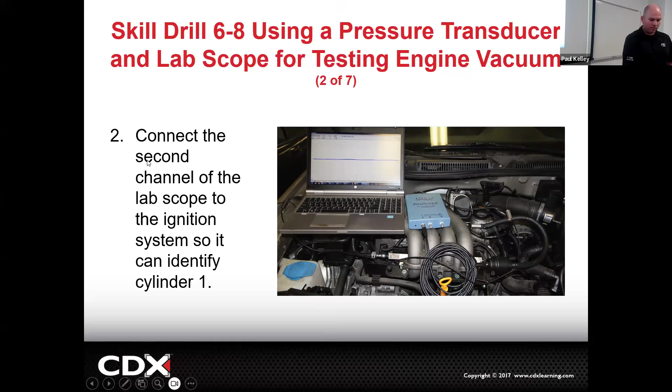That's kind of fibbing, because normally an engine is not a 1, 2, 3, 4 firing order. Let's say it was 1, 3, 4, 2; that would be more typical. If you really want to get in depth, you can narrow down exactly what cylinder is making what amount of vacuum. Remember the Tahoe, I said cylinder 4 had no compression? If I oscilloscoped this, the reading would be low on vacuum when cylinder 4 is on the intake stroke. You could geek out on this, but for now we'll keep it simple and just use the gauge.

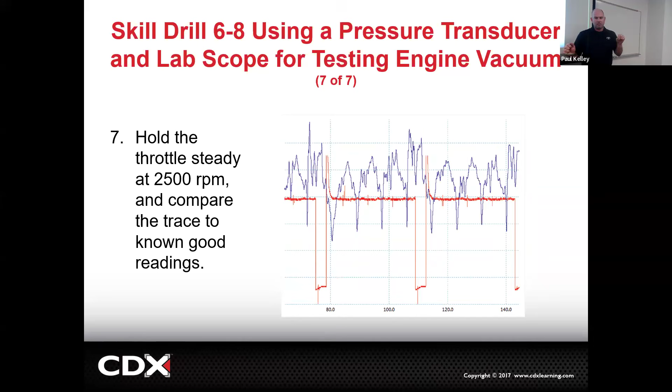Okay. And I think with that, we're probably where we should be. How'd you guys feel? Got any mechanical questions, or you feel decent-ish? All right, let me make sure I tell you what all your assignments are going to be, so you're ready to do